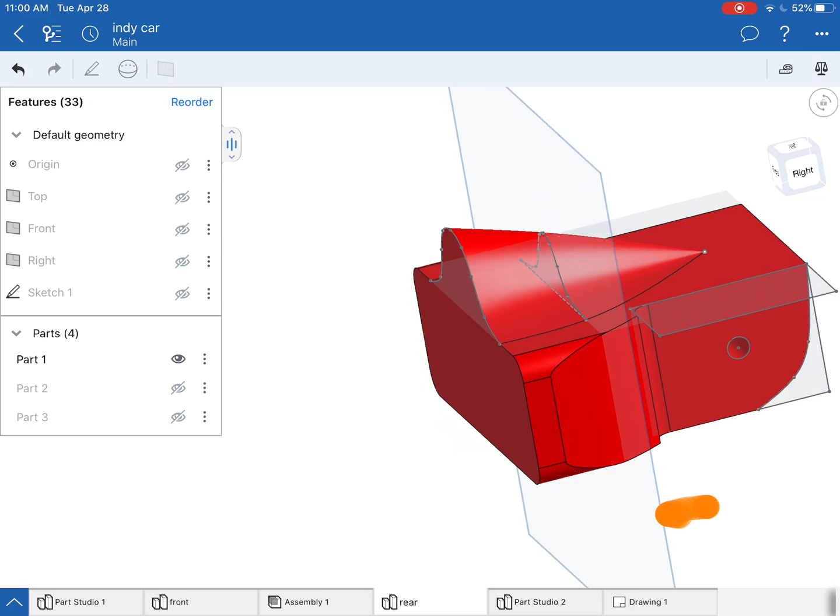So here I kind of played around, created an IndyCar style front and back that would snap to the universal base. And the part that I want to focus in on this vehicle, if I click on the rear section, is this kind of nose shape on the back side.

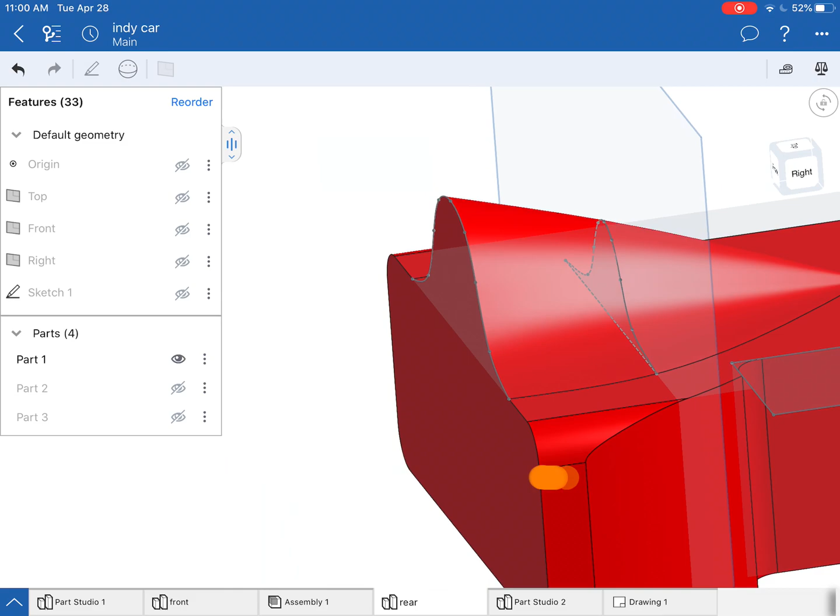And that was done using a loft command, and you can kind of see what's highlighted here. This part of the cone shape is kind of this arch that goes up and around the driver's head. And then I created a work plane that was back an inch or so away from it, and I created another very similar shape but smaller.

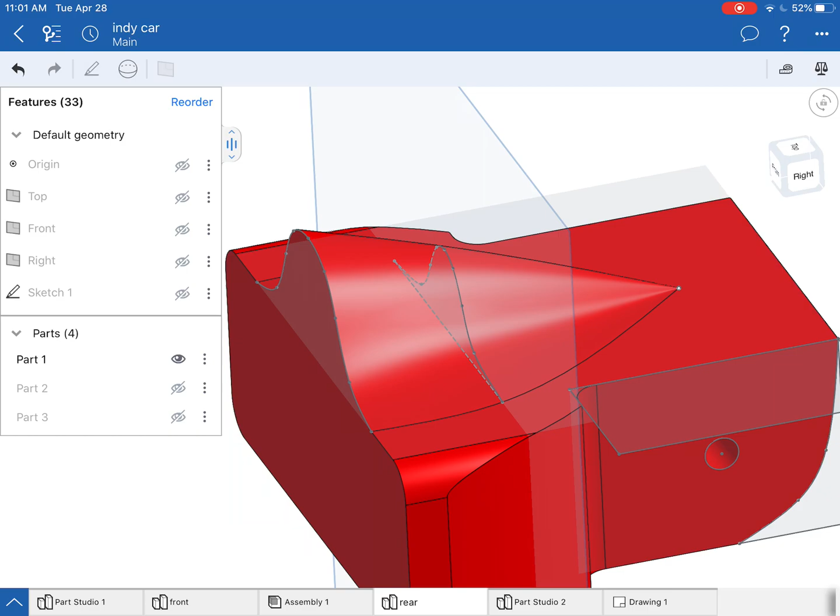And then if we continue to travel back that cone shape, you'll see a point that is right back in there, okay? And then my loft actually goes through all three of those things. So the bigger arch to the second arch, all the way down to that point, and that creates my...

Let me see if I can get that plane turned off. There we go. Turn those guys off. And then you can start to see what that shape is going to look like.

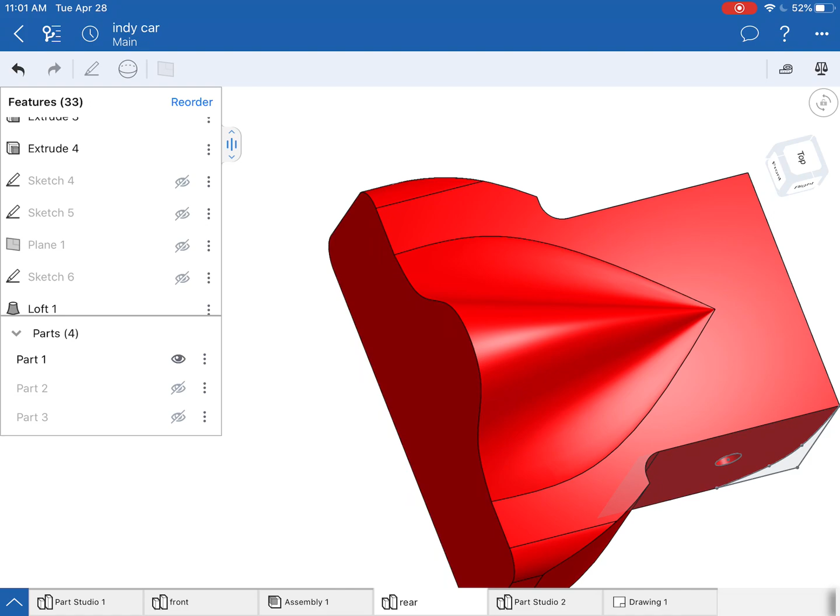Now this is for an IndyCar shaped car, but depending on what kind of vehicle you're doing, you might want to do something similar to that. So I'm going to show you how that's done.

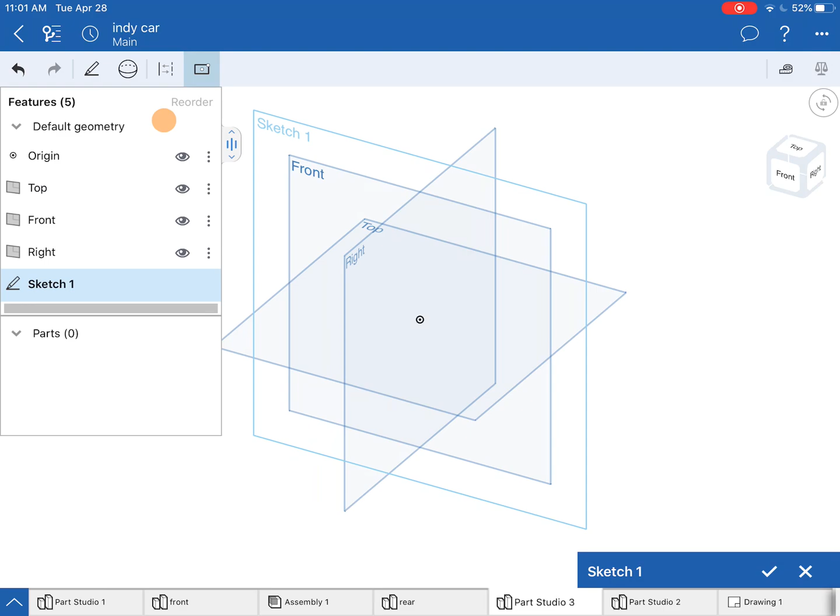So I'm going to create a new part studio, and I will lay out on the front plane. I'll try to create a simple part here real quick to kind of give us something to work off of.

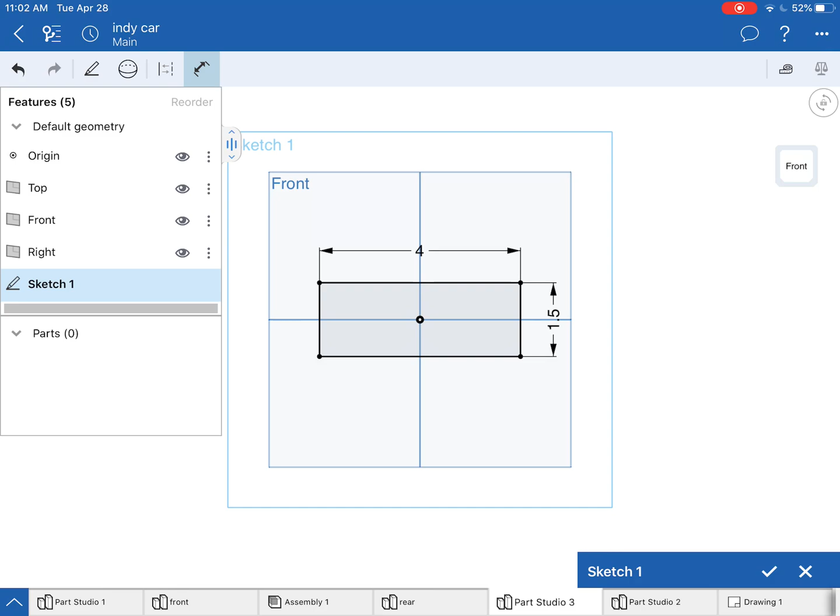I'm just using the same dimensions we used on our other vehicle. Not really walking you through these things—you guys should know how to put dimensions and create extrusions from my previous videos. And I'm going to extrude that 4 inches.

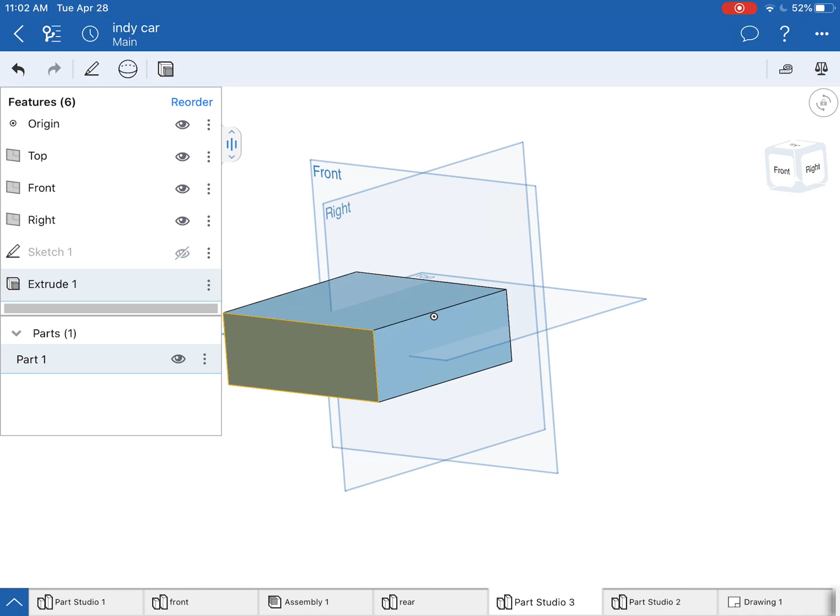There we go. All right, so I'm going to use this as my kind of generic shape that I'm going to create my parts on. So I'll click on that front plane there, or on the side of my vehicle there.

And I am going to, let's view normal. I will use my view to normal and lock it in so it doesn't move. I'm going to use that top line right there because I'm going to snap to it.

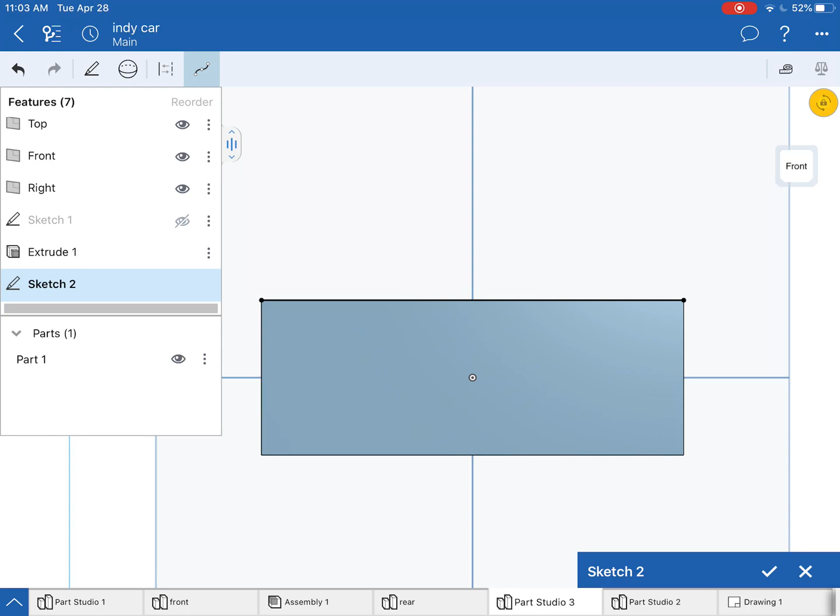And I'm going to use a spline. So in this particular one, I will show you exactly how I made that cone shape. So I'm going to snap—I did the use tool to kind of give me a line so I could snap to it.

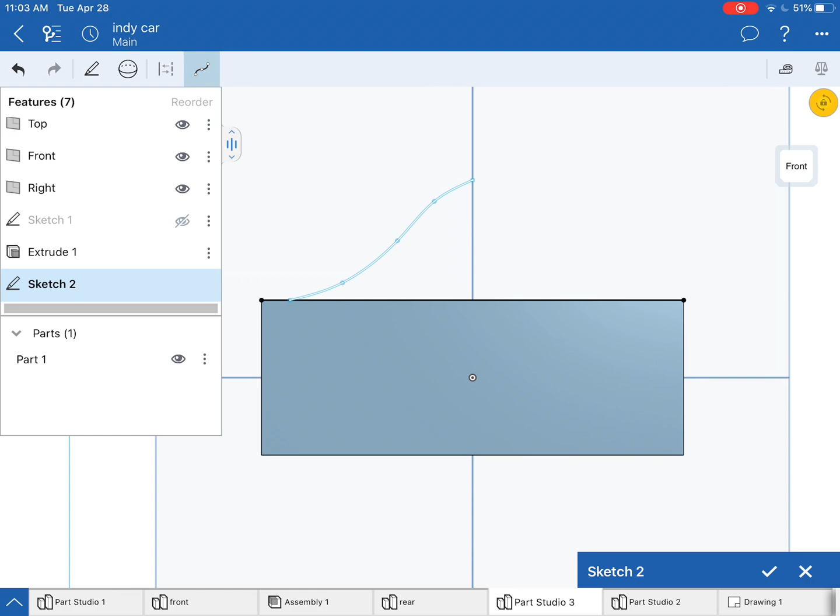And I'm going to just start to climb up the back, creating an arch. Okay, if you notice, I'll drop that spline tool. If you notice at the very top...

If I were to mirror that over to the other side, it's going to give me a point at the top. If I want that to seamlessly blend as a nice smooth curve, what I'll want to do is I'll want to create a line.

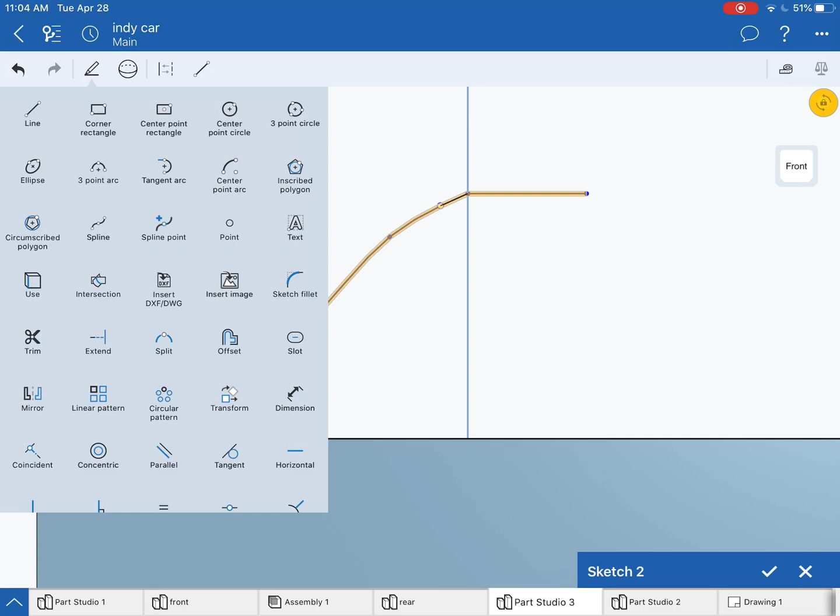This is just kind of a line to use. I'm going to delete it here in a second. And then I'm going to drop that line, select the line and the spline that I made. And I'm going to create a constraint on there for tangency. And now you got that curve that's going to move nice and smoothly into it.

So I'm going to hit that line, 2-finger tap in the background to delete it. Okay, now I'm ready to create a mirror as that jumps to the other side of the plane.

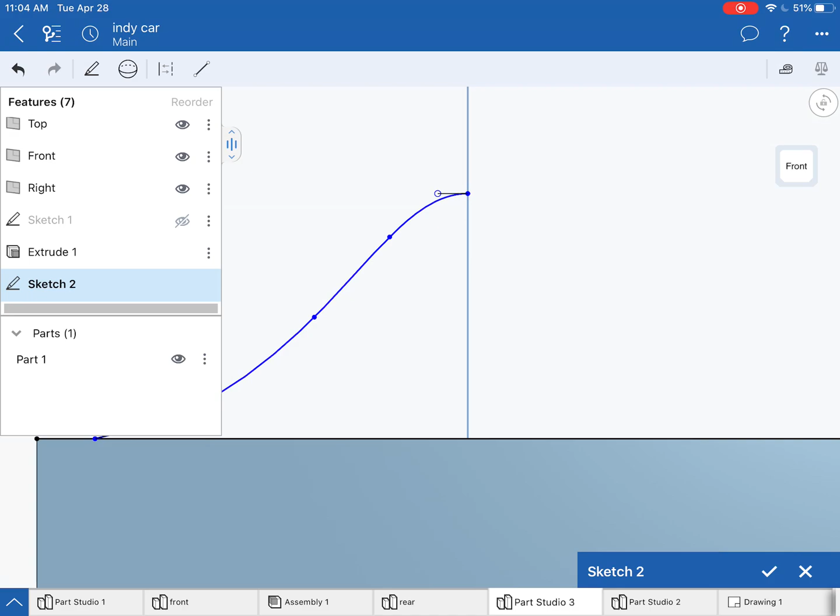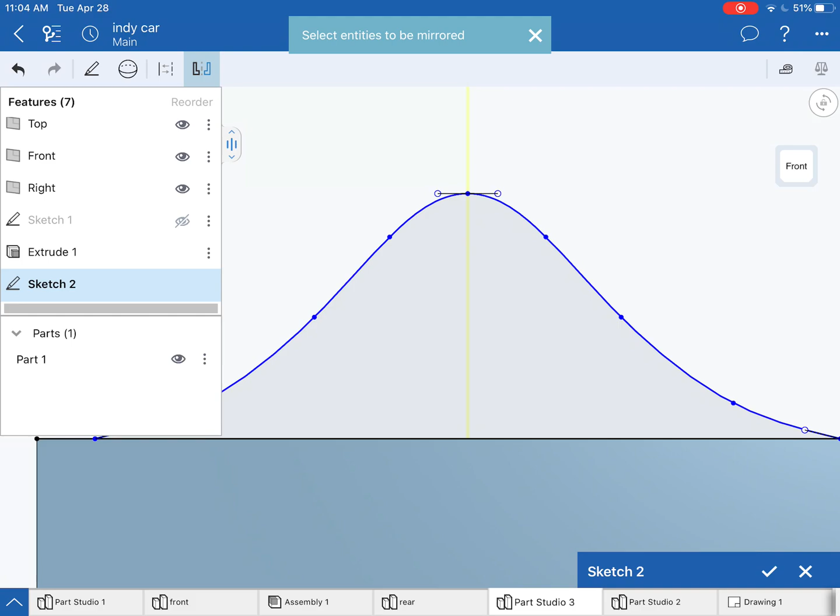So go to your sketch tools, mirror. It asks me to pick a mirror line, which is going to be that plane that's cutting right through the center. And then it's asking me to pick my entities. So there it is, there's my first curve. I'm going to hit the blue check, and that sketch is done.

So let's take a little look. So there's going to be kind of the back of my cone shape. Now I'm going to create a work plane that's offset from that.

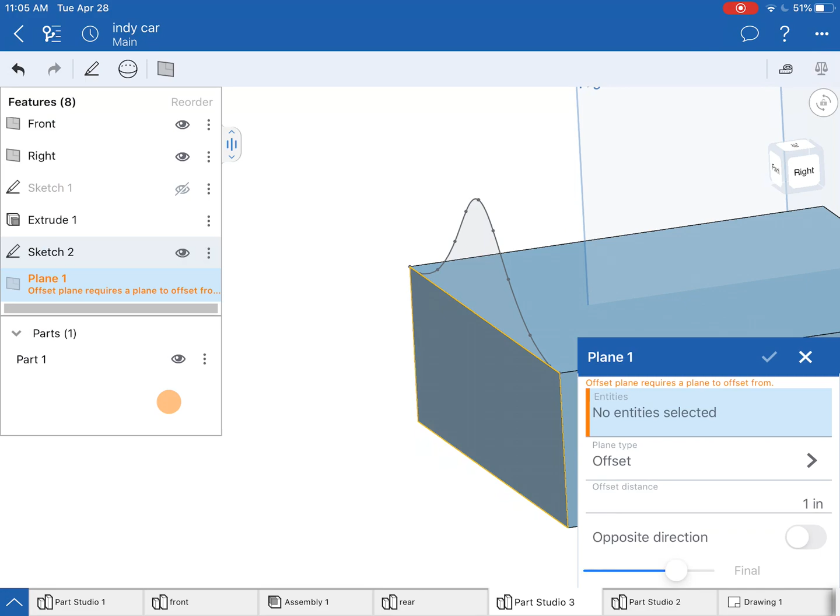So I'm going to select this work plane, go to your 3D tools and pick plane. That's going in the wrong direction from where I want it to go, so I'll check the opposite direction, and I'm gonna make this go a little bit further, 1.25, push it back just a little bit more.

Based on your sketches, I always recommend doing a sketch first. That'll help you dictate what you're using as far as dimensions go.

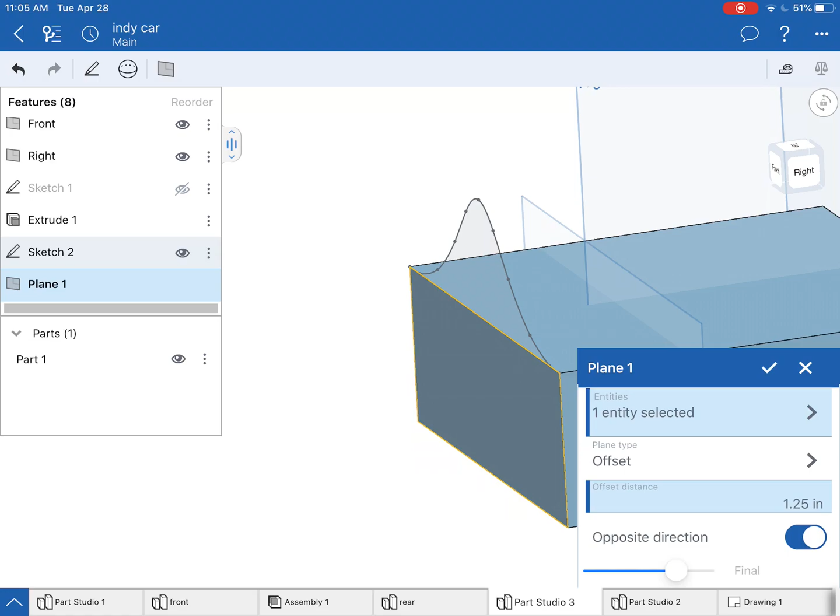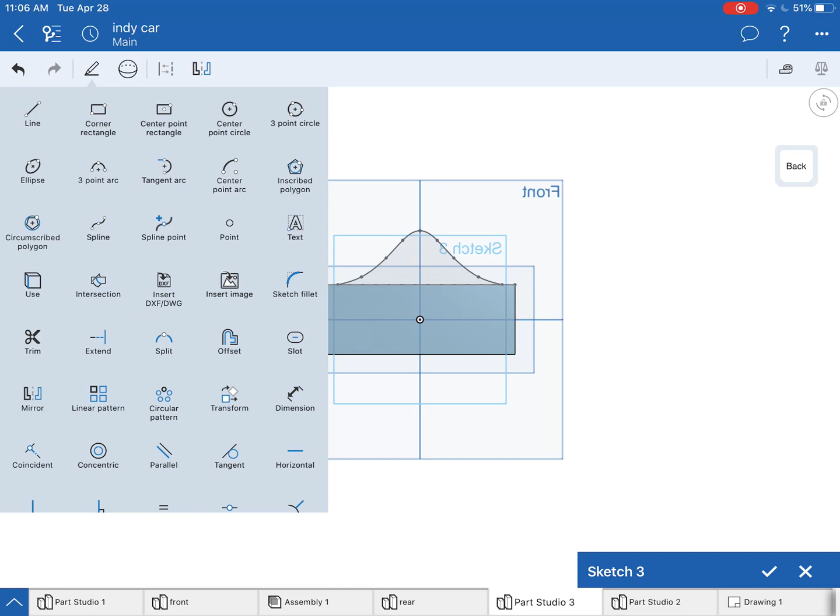I'm going to select that plane. Now I want to draw on the other side of this plane, so I'll rotate this around a little bit and select the back side of that plane, hit my sketch tool, 2-finger tap, view normal. I'm going to lock in rotation and zoom in.

I'm going to use the Use tool to pick that top plane again. When I put my spline in now, I want to put the same number of dots, which will make for a smoother blend. So I'll put one down here at the bottom, boom, and make another one here, here, here, and here.

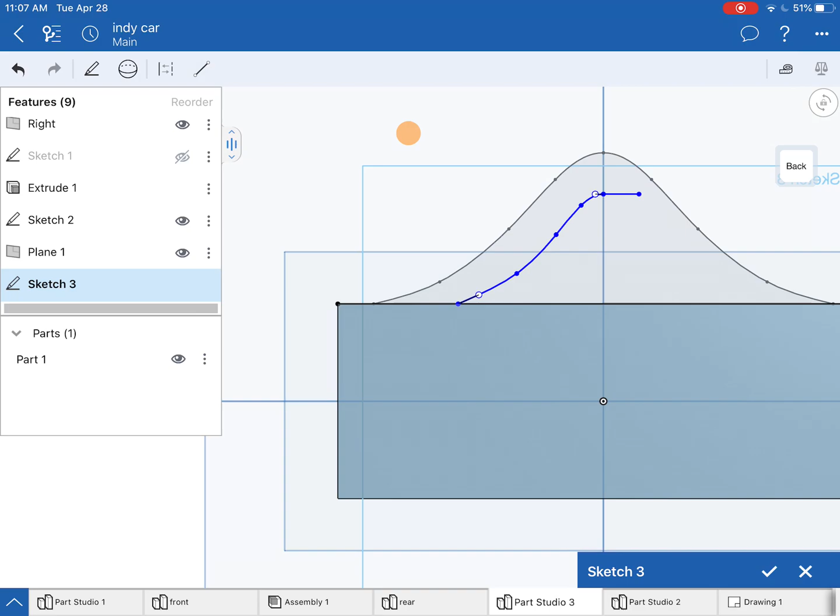Same trick I used before: drop the spline and grab your line. I want that to be tangent as well. Drop your line tool, select, double tap, select your line and your spline, tangent, double tap, pick your line, 2-finger tap in the background to delete it.

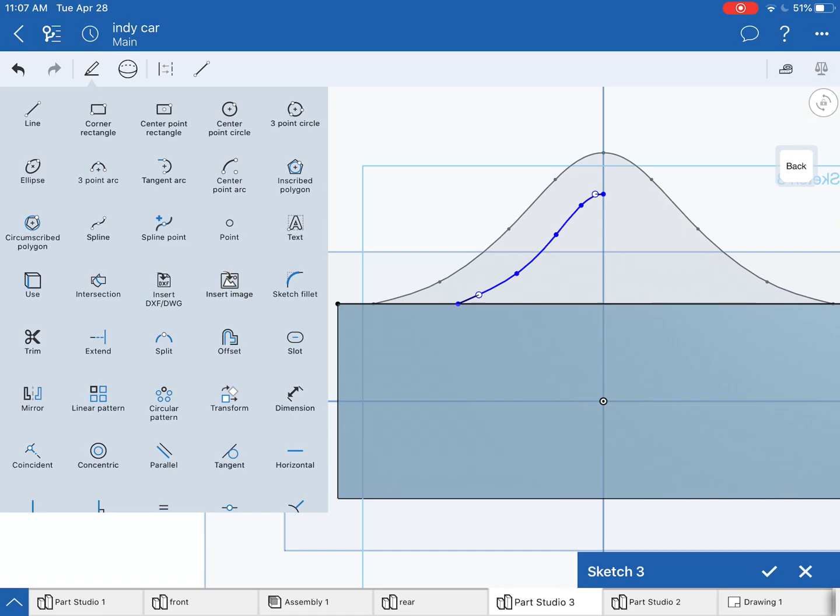Now we're going to mirror it. Pick your mirror, choose your plane, choose your line that you want to mirror, and finish that sketch. So now I have 2 sketches just like that.

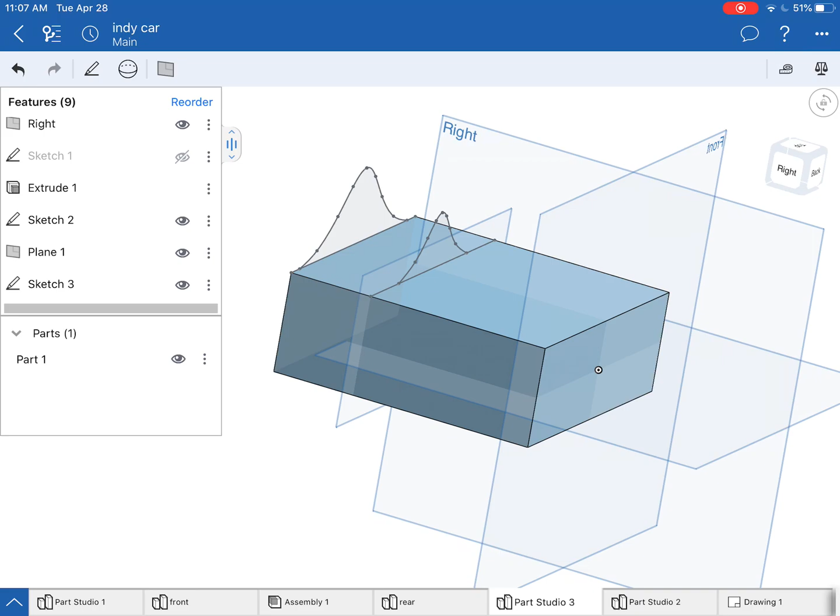If I wanted my shape to be simply a bridge extrusion between those 2 shapes, I can go right to my 3D tool and choose Loft. I can choose that sketch and that sketch, and I would create this loft extrusion between those 2 shapes. All right, that's not really what I'm looking for.

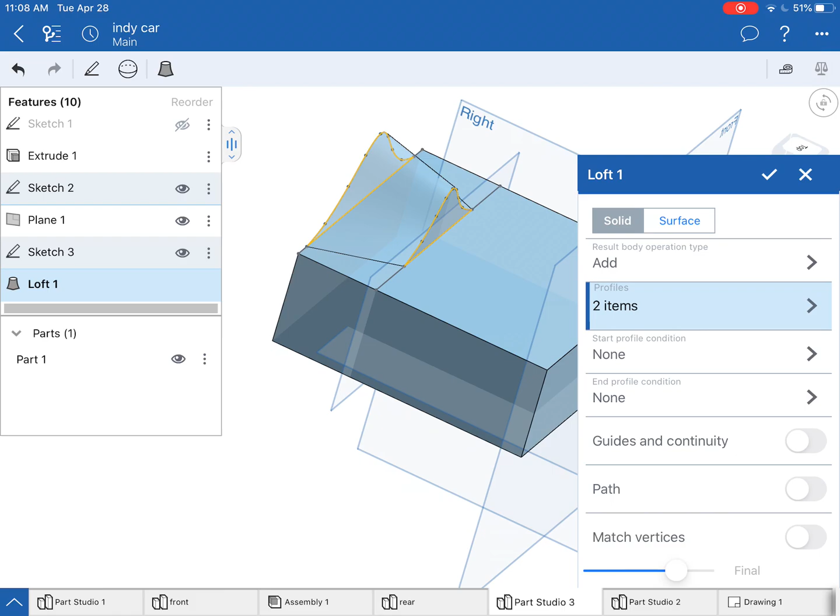I want that to go all the way down to the bottom, so I need one more point way back there. I'm going to delete that, and I will create... you know what? I'll create a point.

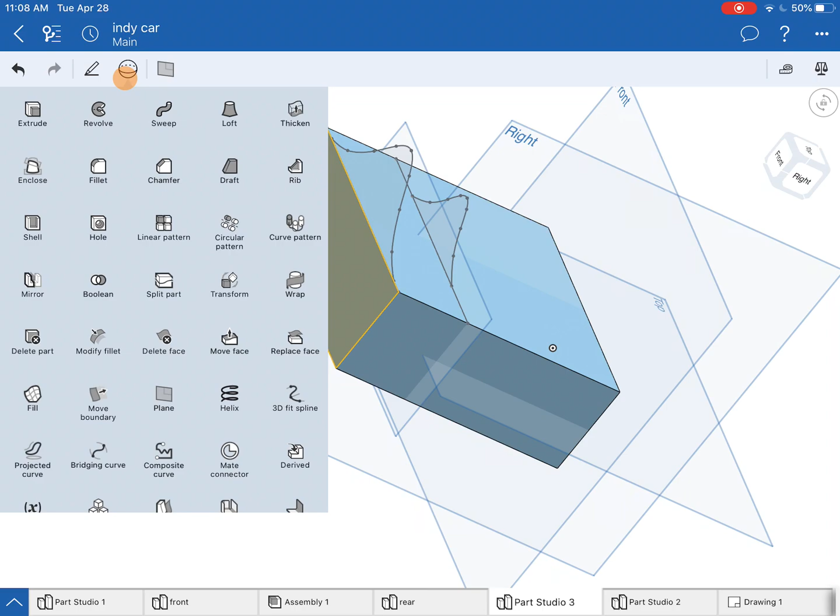I'm going to create another plane, so I'll do a plane again, offset in the opposite direction. This time I want it to go 3 inches back. There it is, way back there, and finish the sketch.

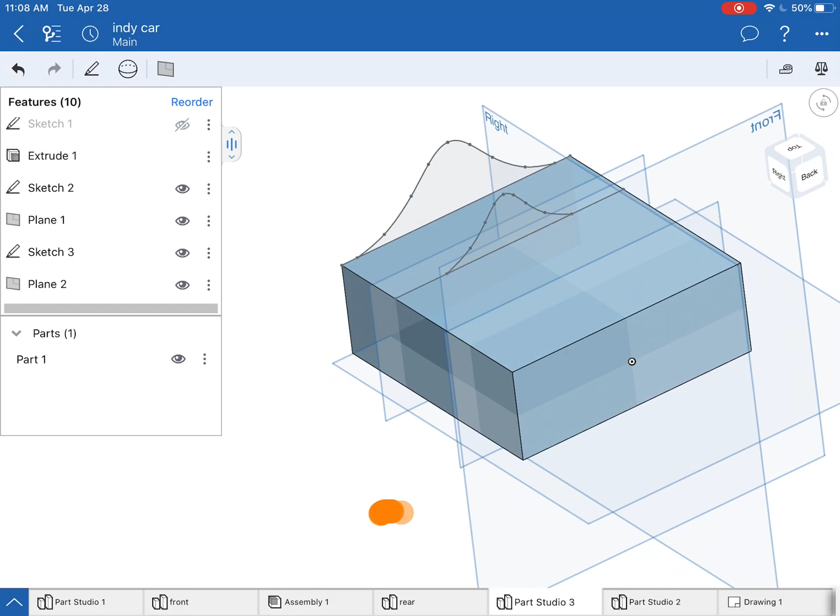Now let's do a sketch on that plane. It's a little tricky to get to that actual plane. Square it up, view normal to. Let's just put a point. I could do another shape if I wanted, but I'm going to have this actually come down right to a point, and I want that point.

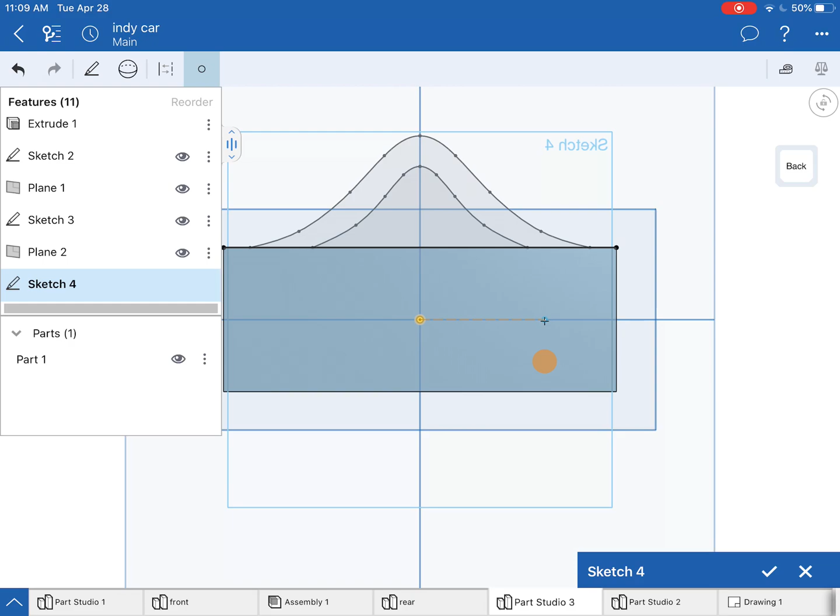Whoops, I forgot to use that line again. So I'll back that up and choose the Use tool. Now I'm going to be able to put that point actually on that line. Sometimes I forget to use that. There we go, so there's my next point, and I'm going to finish sketch 4.

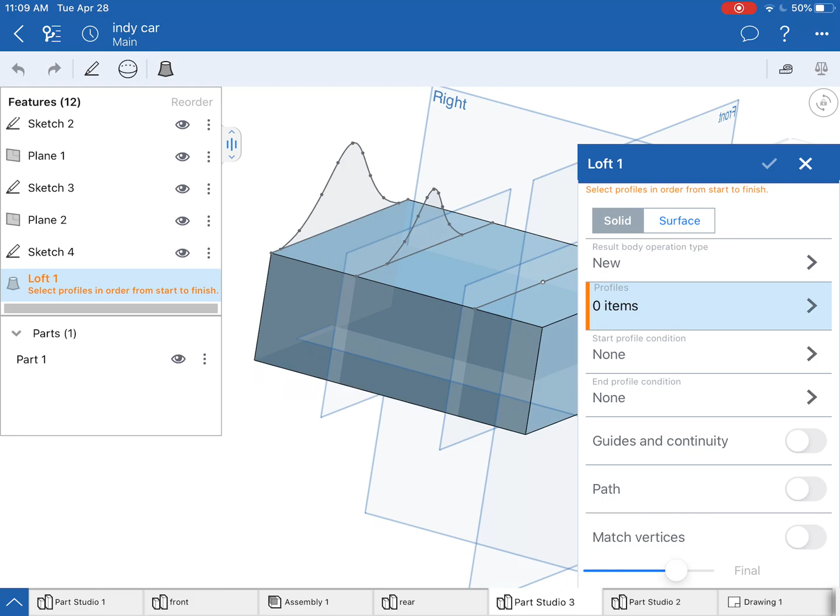Now let's go back to our Loft tool, I mean, and it's looking for our items. So I'm going to choose that sketch, I'm going to choose that sketch, and I'm going to choose...

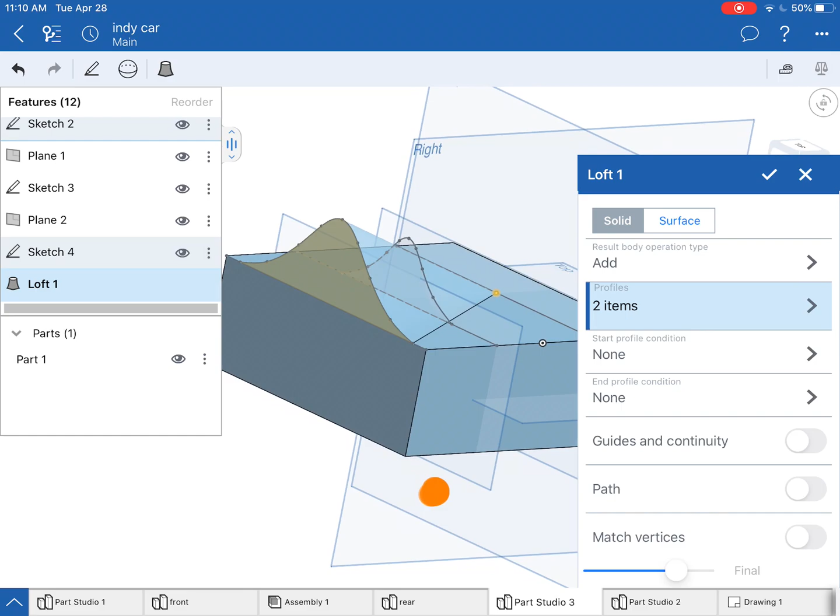Use my precision tool because I want to just get that point. Boom, right there. All right, looks like it's missing that center sketch. So if I look here, I only have 2 profiles selected.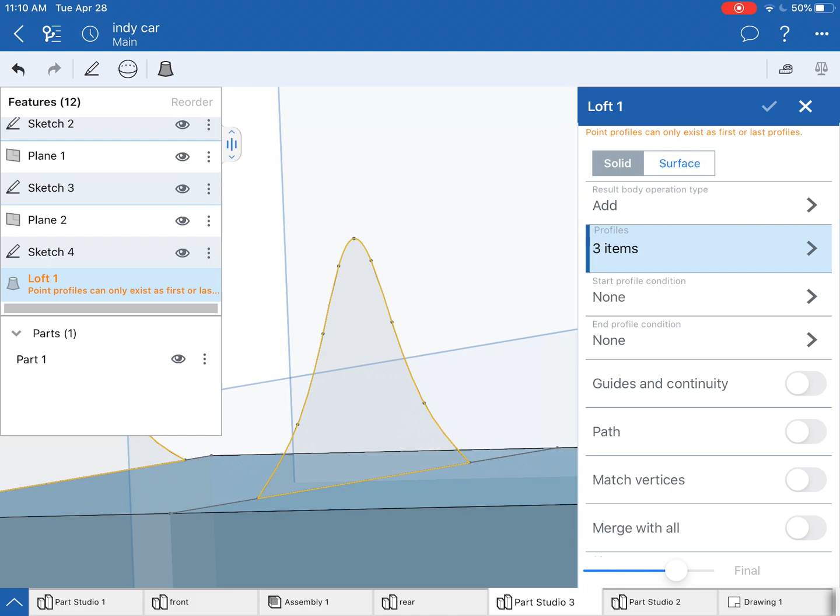So let me get in there and actually pick that. I'm going to select, get rid of those things. For whatever reason, it wasn't liking those 3 that I picked, or maybe you need to pick them in the right order.

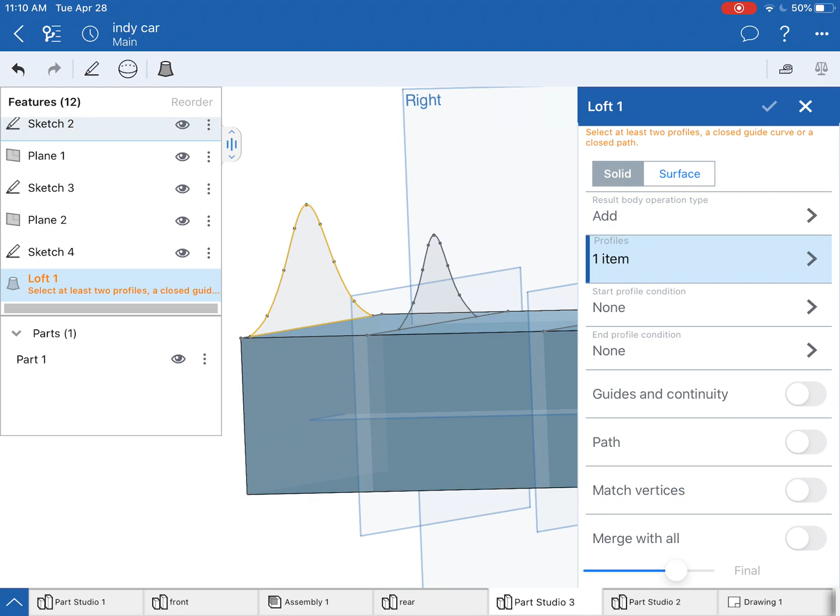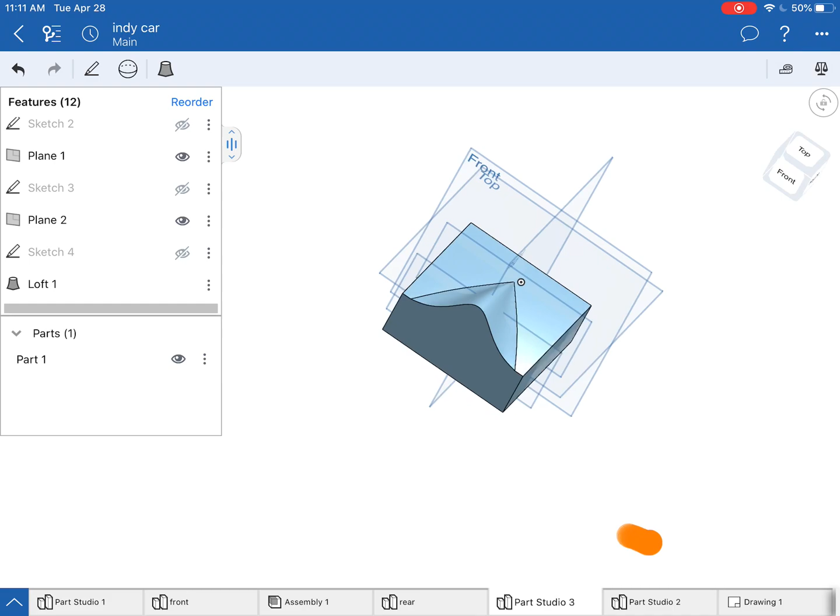So if I go back to my profiles, choose that one, and choose the point. Boom, there it is. Now it's projecting through all 3 of those items. Hit the check, and there is your cone shape that I had created. All right, very, very cool.

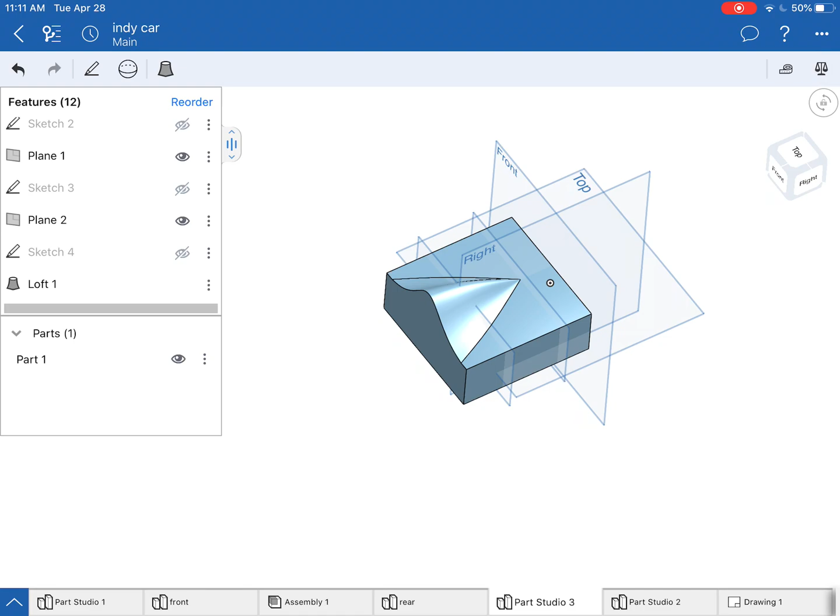So you can either loft between several different planes and sketches on each plane, or through just 2. It's totally up to you. I think on my windshield I had 2 different planes that I was going between. And remember, if it gets tricky selecting your little sketches, you can come over here on the browser as well and choose the sketch you want to use if you can't select it because you have too many work planes and stuff showing up.

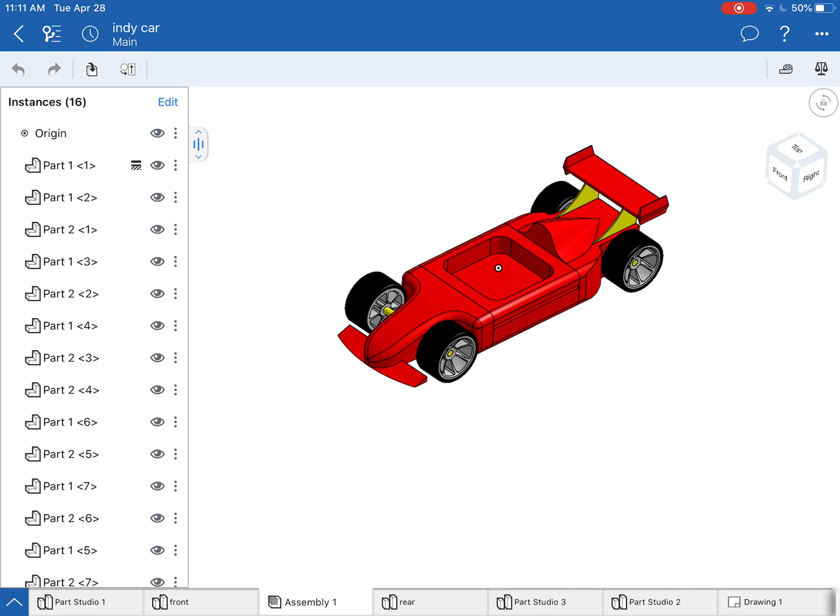All right, so that concludes that tutorial. Go back to the assembly one more time and you can kind of see how all that comes together.